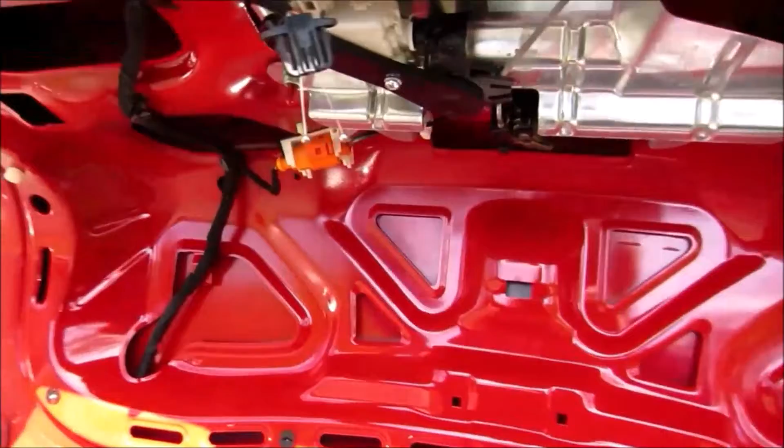So I've spent a couple of hours here actually tracking down yet another trunk lid release problem. And the reason I wasted so much time is this Bentley, very expensive VW service manual. This was like $125. Is wrong once again.

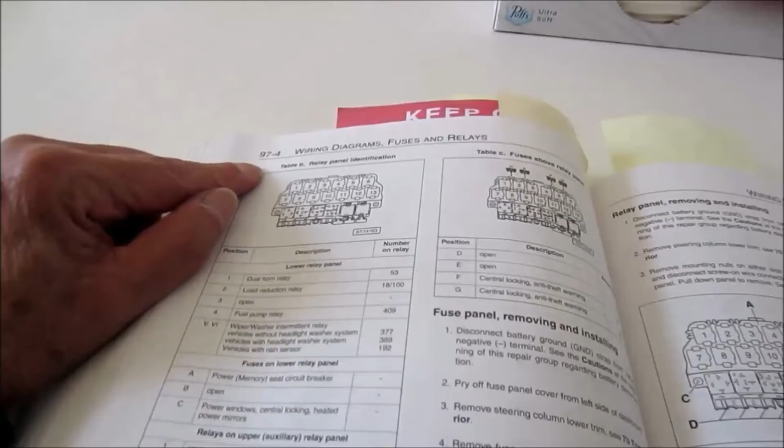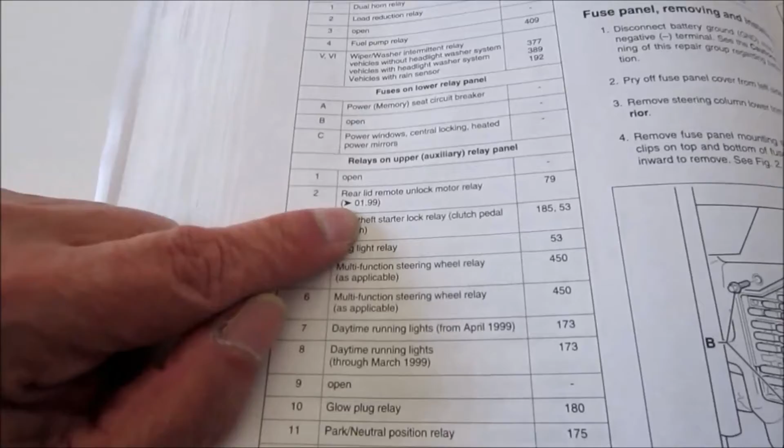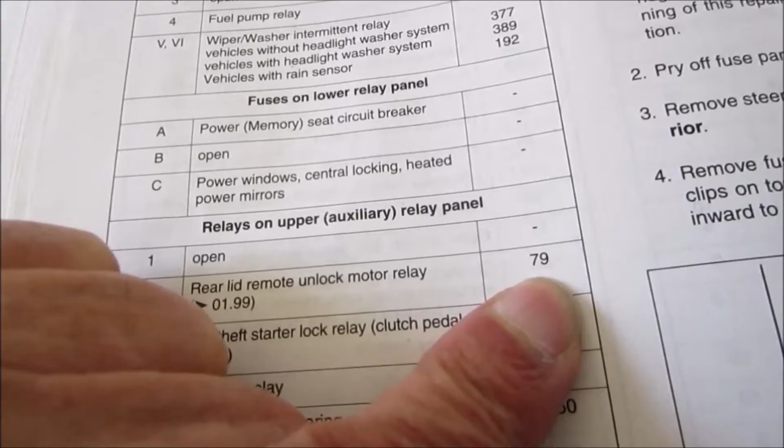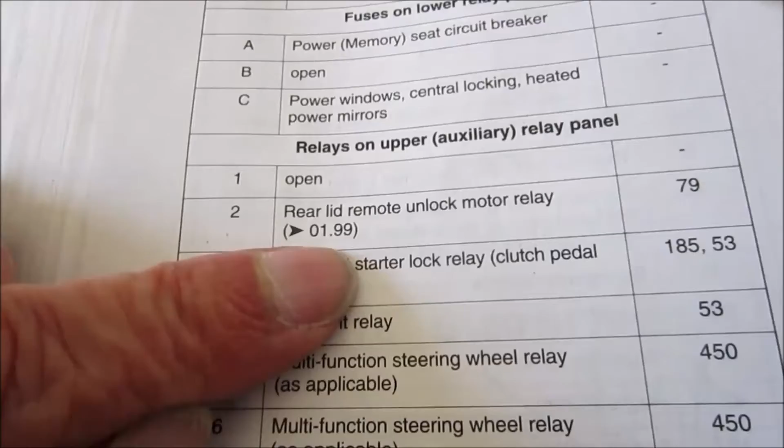See here on page 97-4, they show this relay panel, and right here, rear lid remote unlock motor relay, number 79, supposed to be in position 2. Now I'm thinking maybe this here means it only applies to the 1999 model. I don't know. It's supposed to be right here in position 2.

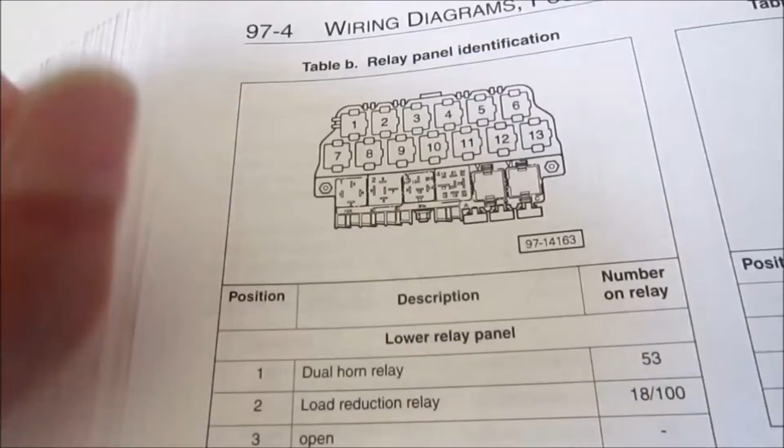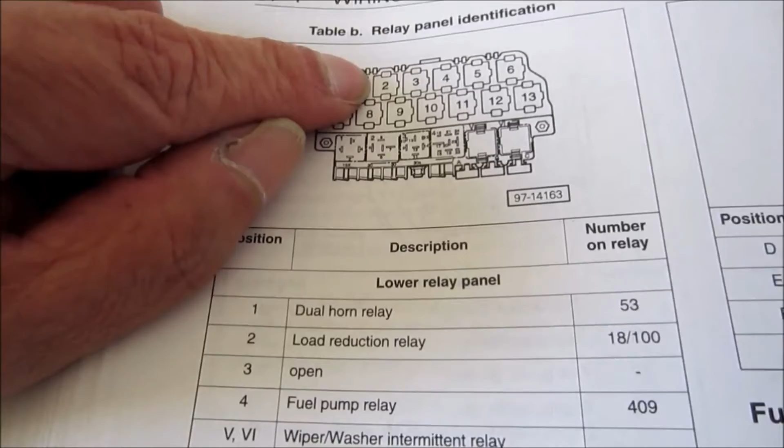I can tell you we've had trouble with every other relay in this panel. Wiper relay, fuel pump relay, I mean you name it. All of these relays have failed. So I'm going under there and I'm looking for this relay, figuring that we have yet another failed relay. Well, there's no relay there. There's nothing there. So, wild goose chase here. Took this all apart for nothing.

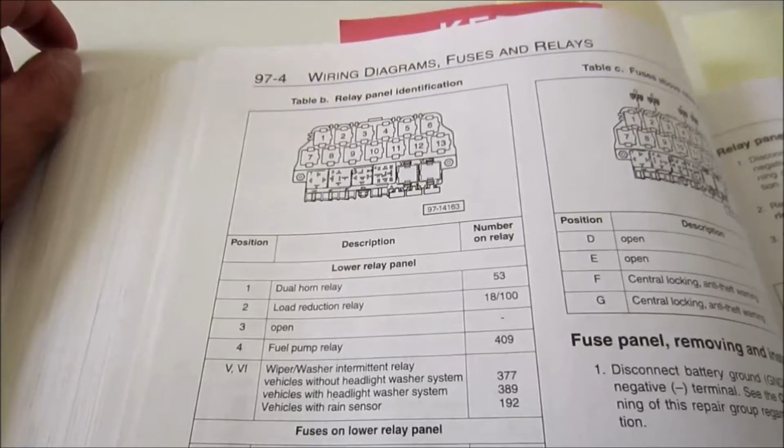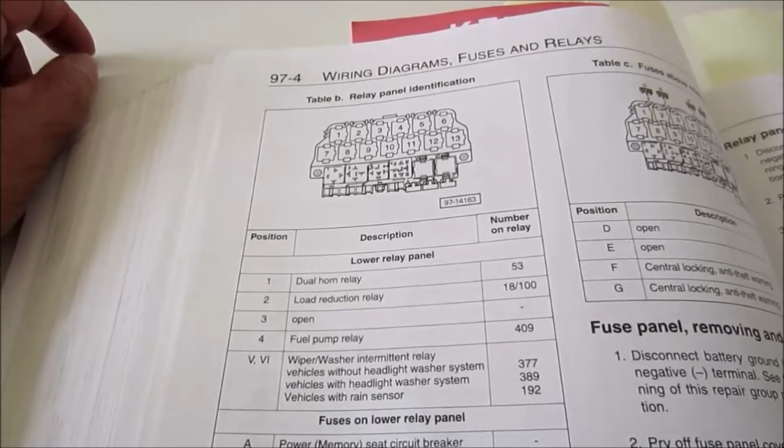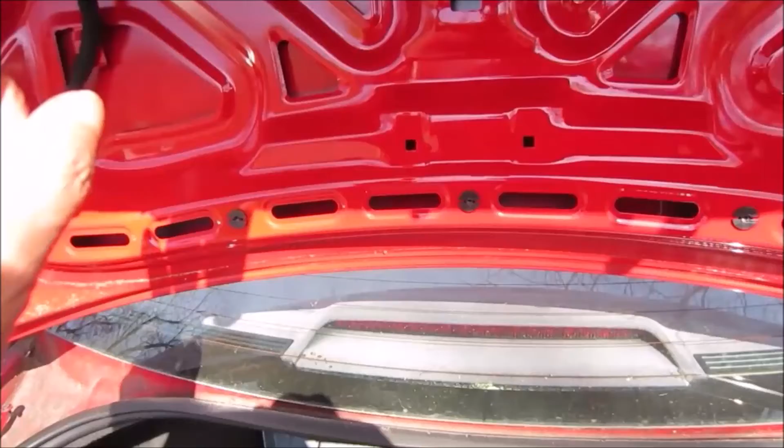But, fortunately for me, there was a nice fellow on VW Vortex that said he had a pinched wire. And I think mine is exactly the same. Let's go find it. Okay, so you can see my test tools here. I've got my meter. We've already verified no voltage. We've already taken the dash apart. There's no relay. But we follow this wire.

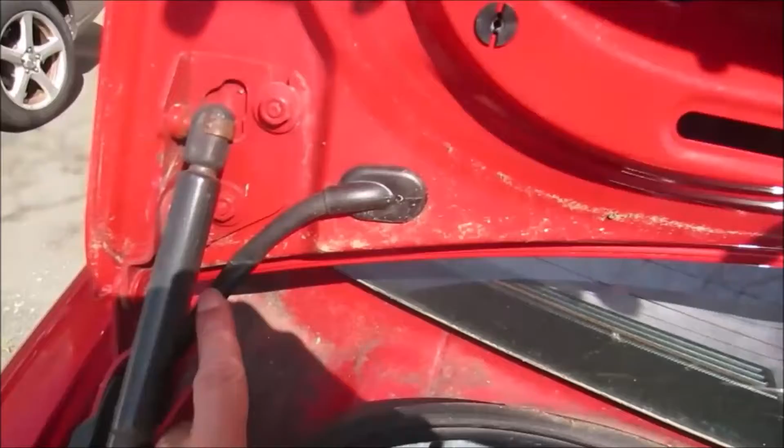And the Vortex guy said, look for a pinch. And what do we see right here? Why didn't I see that 2 hours ago? Do you see the pinch? Now I'm betting that when I slice this open, we're going to have an open wire here. And that's my problem. So again, the symptoms. We've confirmed no voltage here. There's no relay, so that was a total waste. But I've got a pinch here. So let's slice that open. Let's see if we find a broken wire.

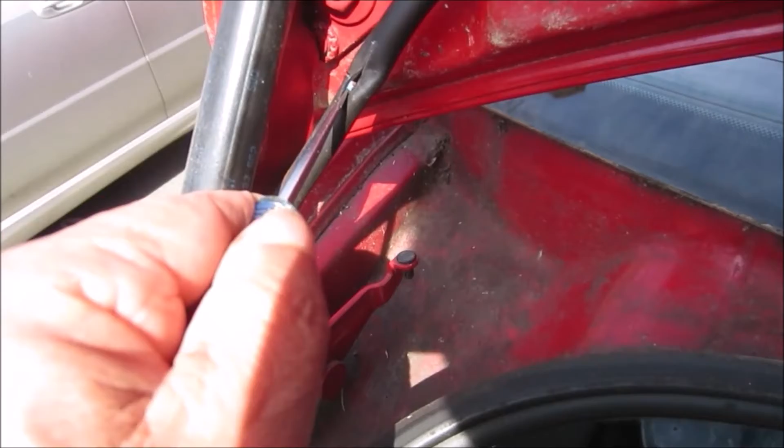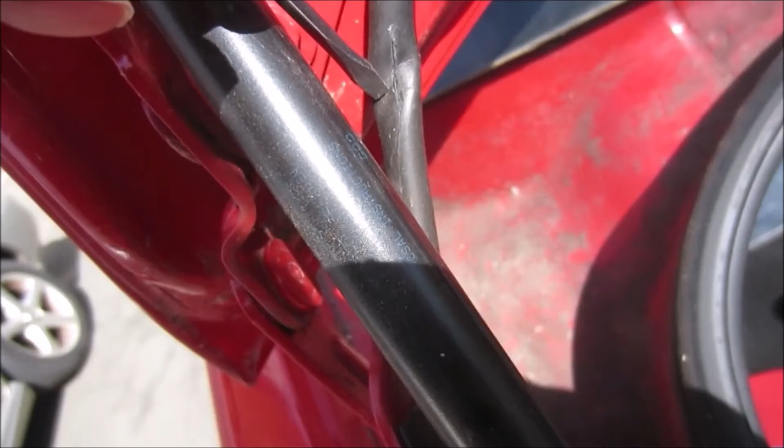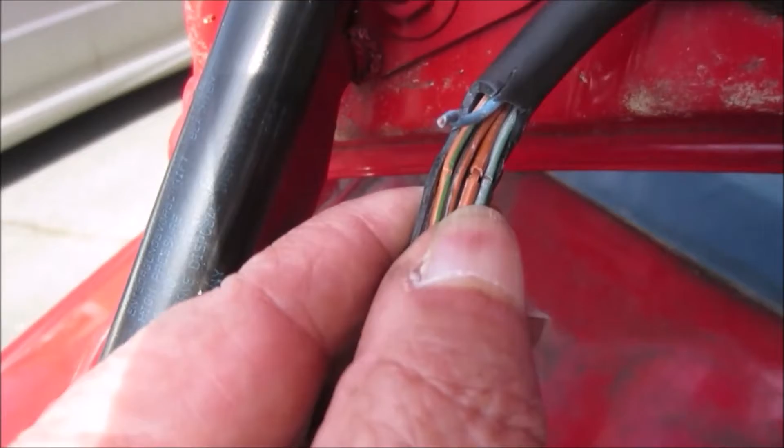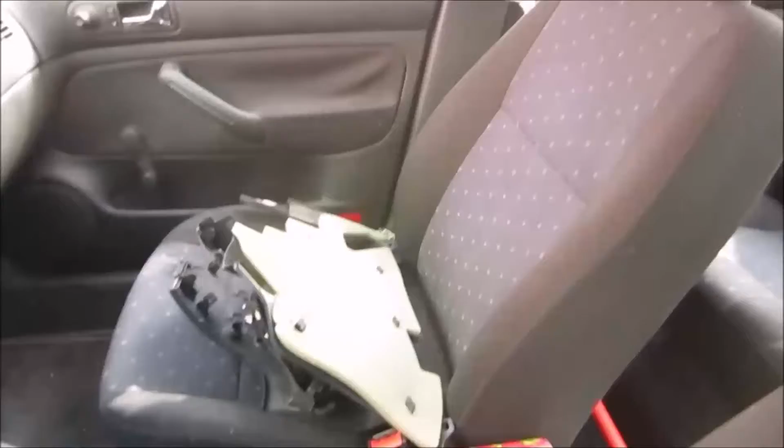Now this strut is in your way, and also the wire is cut under this, which is attached to this hinge. Best to get that completely out of the way because you can't work on this when it's all tucked up under here. I gotta tell you, I am so upset over wasting so much time looking for a relay that does not exist. Took my entire dash apart again. Have to put all these pieces back together. Took it apart for nothing.

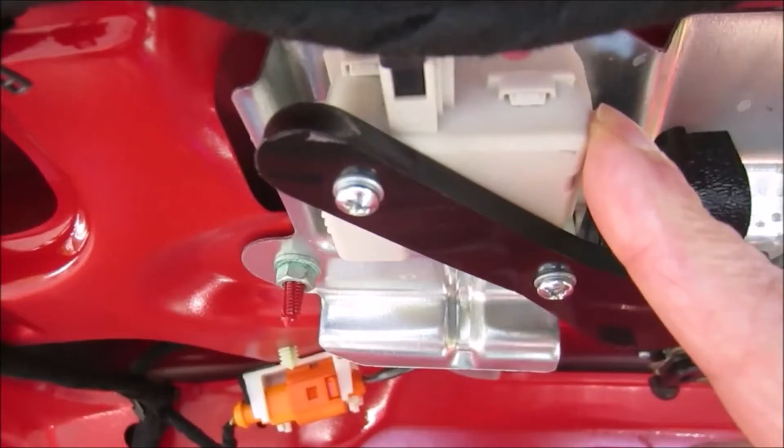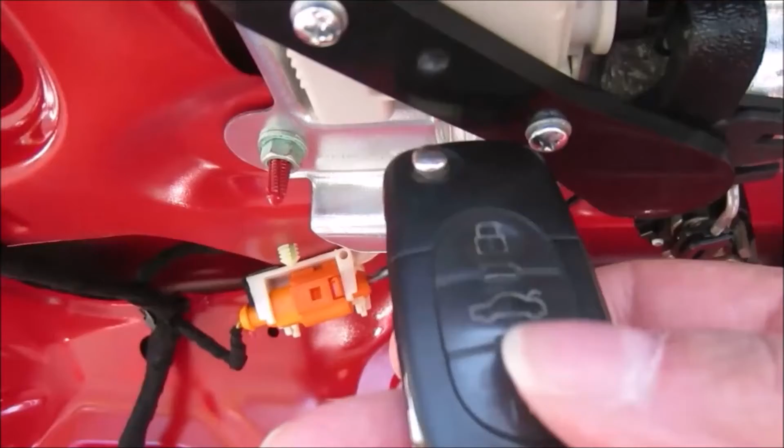So now that we've identified the problem, we have one severed wire and 3 nicked wires inside this cable. We should try jumping these 2 wires to see if that's all we need to do to get this actuator to work again. Now the problem is, unlike last time, the actuator is not making any noise when you press the trunk release. Doesn't work from the fob, doesn't work from the switch on the door. You press this, no noise here.

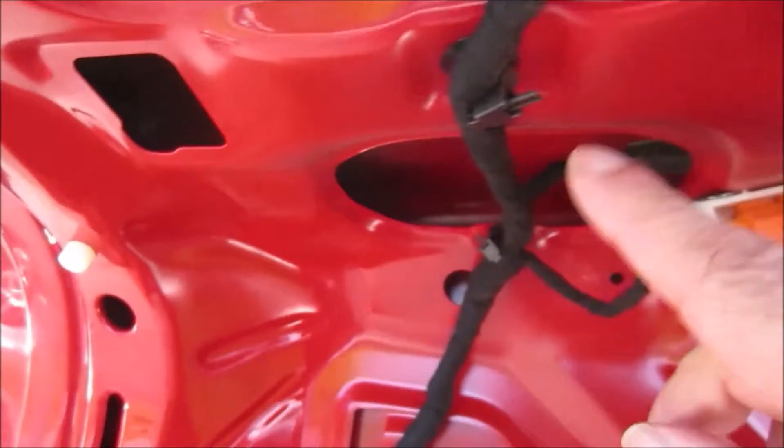So we disconnected the power supply cable. We tested the cable, there's no voltage on the cable when you activate the trunk release. So we follow this wire down and we found a big nick here, just as others have reported. This rubber is very difficult to open up, but when we opened it up, you can see what we found. The green wire is nicked, this brown wire is nicked, this other brown and black wire is nicked. Only the one way down the bottom is not nicked. And of course this blue wire was completely severed.

So here's what we're going to do. I'm going to put this jumper cable on it, and we'll see if we get the trunk motor, otherwise known as the actuator, to make some noise. Now remember, the last time we were making all kinds of noise, the trunk wouldn't open, and that's because this plastic piece was broken, and we fixed it permanently with this nice repair kit. That's not our problem this time. Well, I'm going to press the fob and let's see if it makes some noise. Oh, she's working now.

So all we should have to do, well, if we solder that back together and somehow re-insulate this, it's going to work for at least a little while. The right way to do this, to make it work for another 25 years, would be to replace this whole cable. I must have spent an hour today trying to find the part number for this harness. Couldn't find it. So for right now, we got to get this working. We're going to try soldering this together, and at least we'll have a temporary repair. Like it never happened.

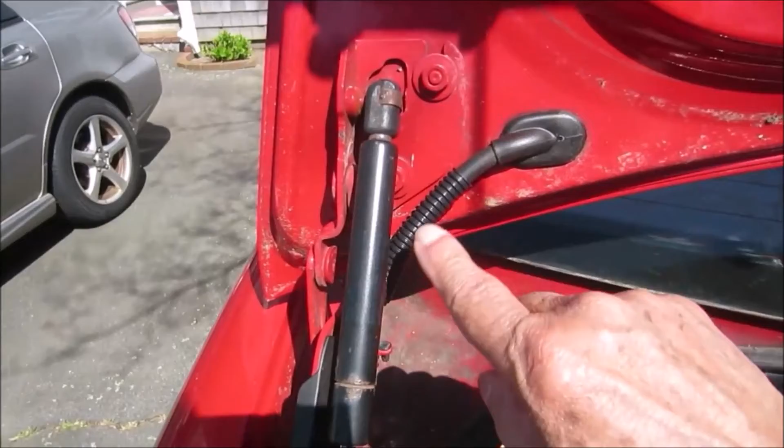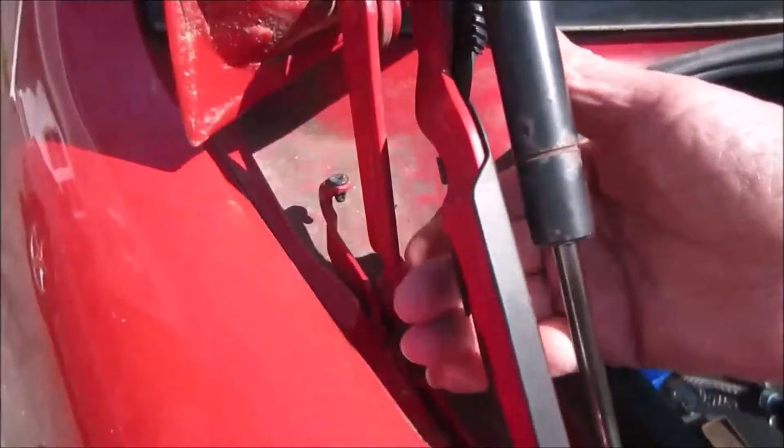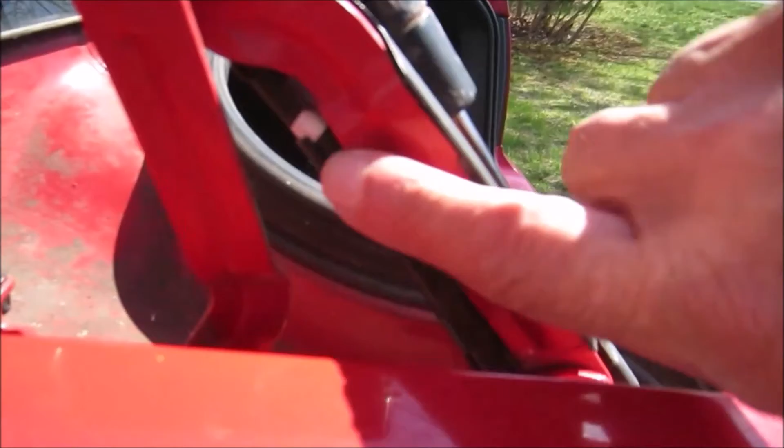So what I did, I soldered the severed wire and I just taped the splits on the others, and this is just a piece of loom. Now the detail on this clip, the clip here that holds the wire below the hinge, this clip is contoured to the shape of the hinge. And if you look at it on the side, you can see the wires just clipped in underneath here. And that must be its purpose. So we're all back together. See, there's a little ridge here, so that's where this curve would be. Let's give it a final check.

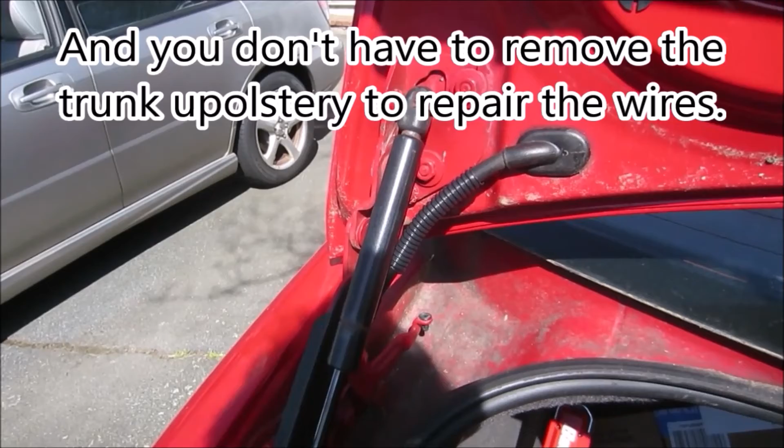Am I super happy with this? No. It'll probably break again, but it's easy enough to pull this loom off and reconnect it. At least it's fixed. So now you know what it is, and instead of tearing your hair out, you should be able to fix this in a half an hour or so. So I hope this helps someone.